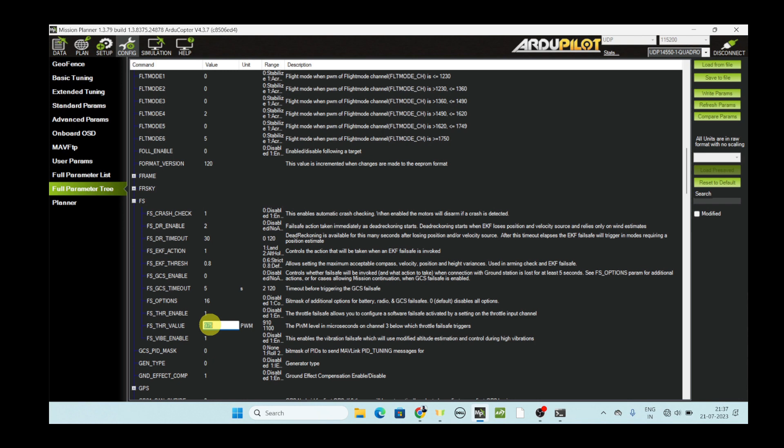First flight settings for an autopilot based drone. To set up your quadrotor for its first flight, follow these general steps. Always keep in mind that the specific details might vary depending on your hardware and software versions. So, always refer to the official autopilot documentation and the manufacturer's instructions for your drone components.

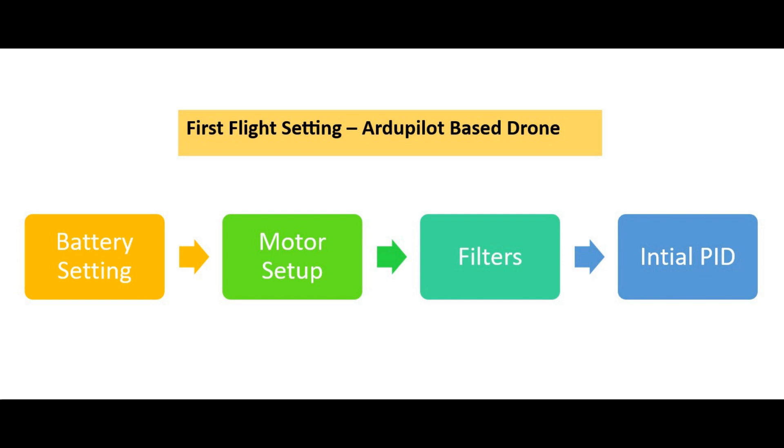Now, I will provide a general outline to get you started. First, battery setting. Second, motor setup. Third, adding filters. And finally, setting up the initial PID. First one is battery setting. Configuring the battery settings for your quadrotor ensures safe and efficient flight operations. The battery setting in a quadcopter primarily involves setting the battery capacity, voltage and current sensor calibration, and low voltage cutoff parameters.

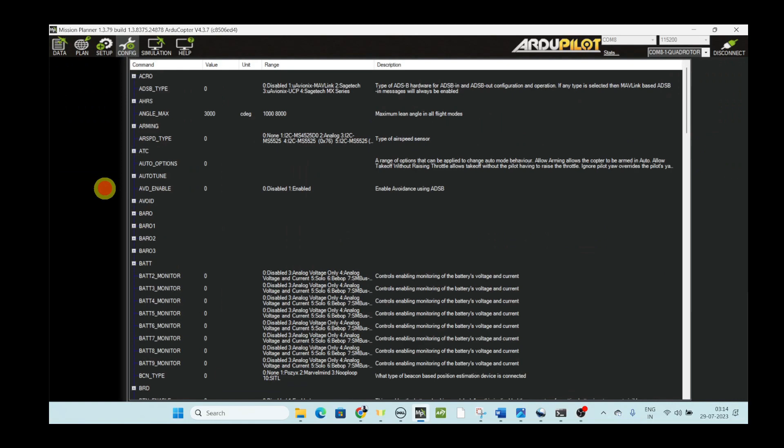Then battery capacity. In Mission Planner, go to the full parameter list or full parameter tree. Look for the parameter named battery capacity. Set this parameter to the total capacity of your drone battery in milliampere hours. For example, if your drone battery capacity is 5000 mAh, you have to set 5000.

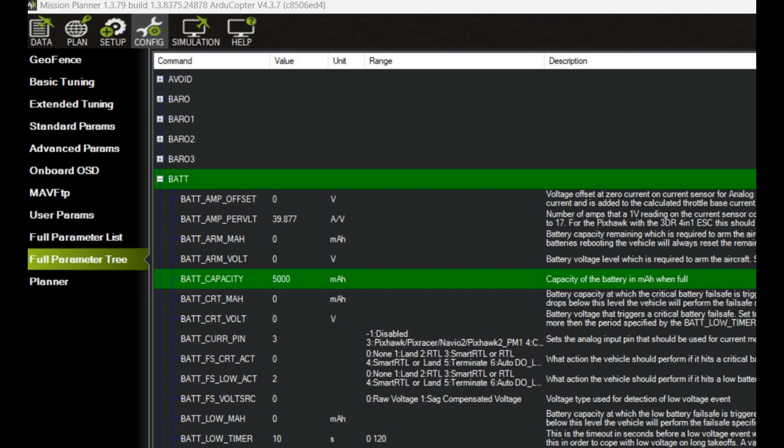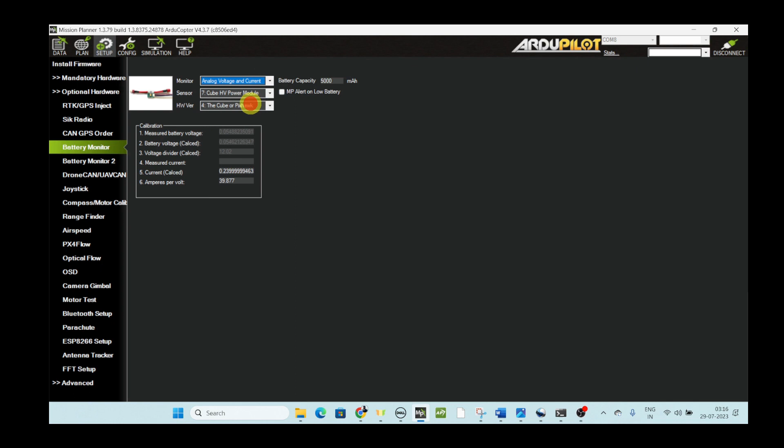Then voltage sensor calibration. Your flight controller may have an onboard voltage sensor connected to it. Calibration ensures accurate reading of the battery voltage. For many modern flight controllers, the voltage sensor calibration is automatic and you don't need to perform it manually. However, it's essential to double check it.

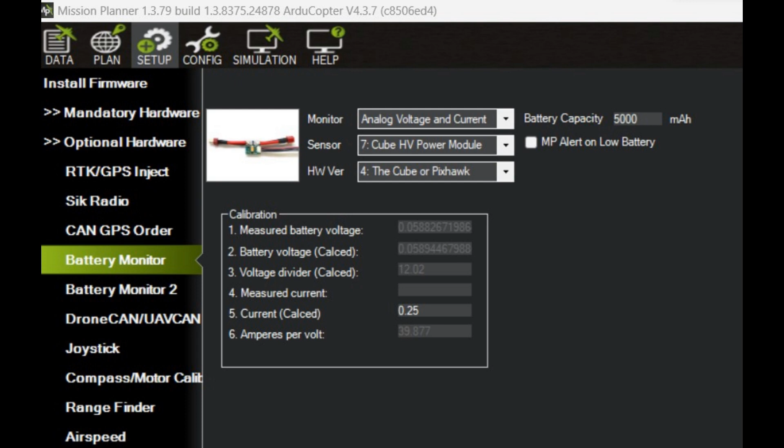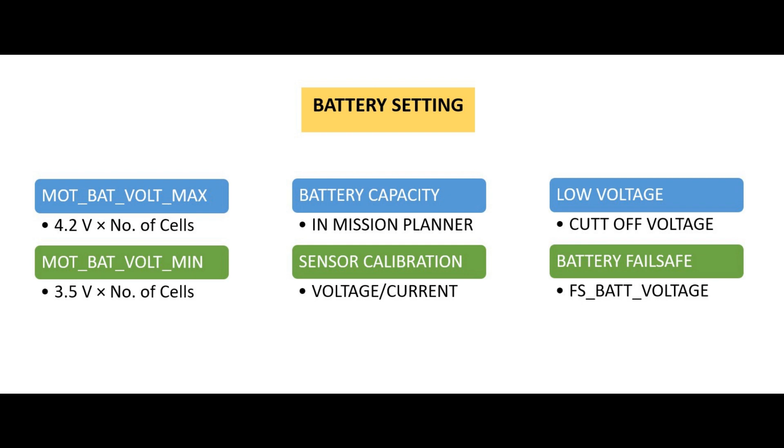Then, current sensor calibration. If your flight controller has an onboard current sensor, or if you have an external current sensor connected, you may need to calibrate it for accurate current readings. Then, low voltage cutoff setting. This low voltage cutoff setting is to prevent over-discharging your battery, which can damage it and reduce its lifespan.

The low voltage cutoff will vary depending on the type of battery you are using, for example, lithium polymer or lithium ion. So always refer to the battery manufacturer's manual for the safe voltage range. Then battery low voltage setting. Set this parameter to the voltage at which you want to trigger a low voltage warning.

Then fail-safe battery voltage. Set this parameter to the voltage at which you want the flight controller to initiate a fail-safe RTL action due to low battery voltage. This value should be lower than the battery low voltage.

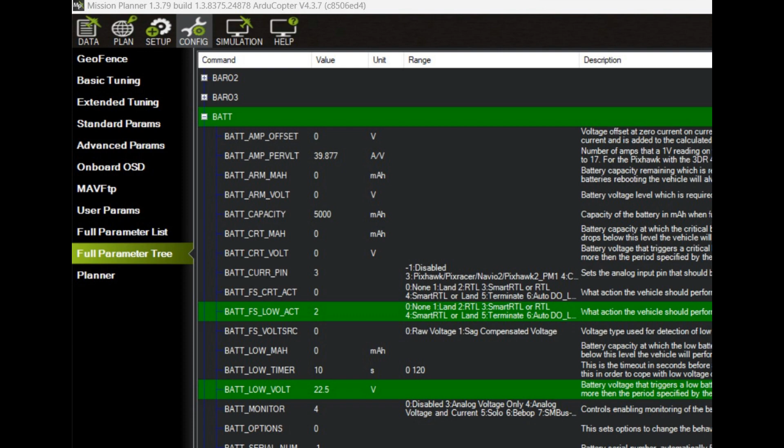Then motor setup. Configuring the motor settings for your quadrotor is to ensure that all the motors spin in the correct direction and at the proper speed.

First one is motor order. First, ensure that the motors are correctly connected to the corresponding motor output on the flight controller. Different frames and different flight controllers may have different motor layouts, so make sure you have the motors connected in the right order.

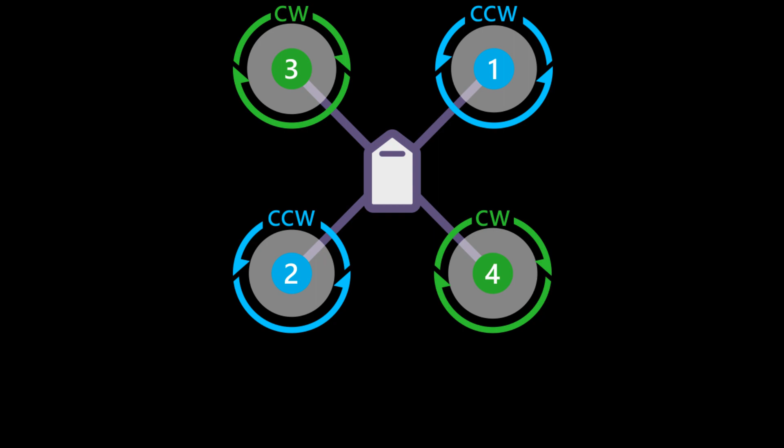Then motor direction. Confirm that each motor is spinning in the correct direction. In the quadrotor, the motors on the front left and rear right side should spin in the clockwise direction, and the motors on the front right and rear left side should spin in the counterclockwise direction. If any motor is spinning in the wrong direction, you can usually reverse the motor direction.

Then propeller installation. Ensure that the propellers are installed correctly on the motors. Each propeller should be securely attached and facing the correct direction. Then motor parameters. ArduCopter allows you to configure specific motor parameters to match your quadrotor's hardware setup. These parameters can be adjusted using Mission Planner.

First one, motor PWM minimum. This parameter sets the minimum PWM value for the motors. The value should be set so that the motors spin at idle so that the quadrotor is stable without lifting off the ground. Then motor PWM maximum. This parameter sets the maximum PWM of the motors. The value should be set so that the motors reach full throttle without overloading them.

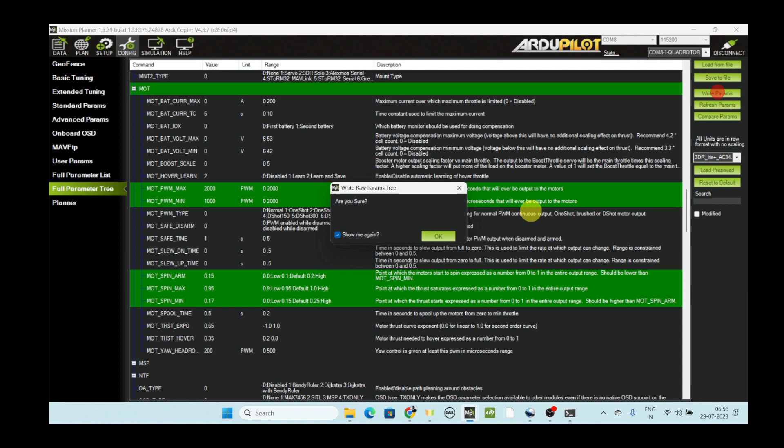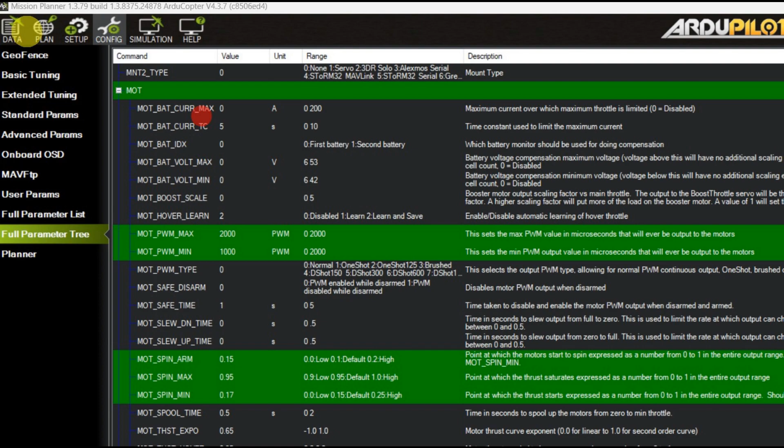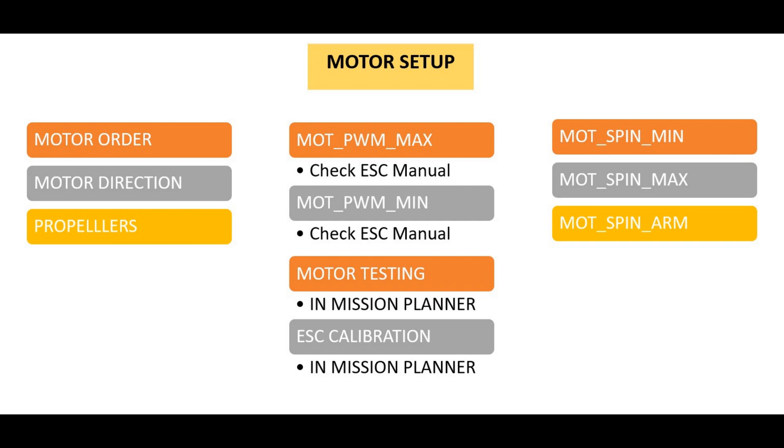Then motor testing. Before your first flight, perform a motor test to ensure all motors are spinning correctly and responding to the throttle inputs from your handheld transmitter. You can do this in the motor testing section in Mission Planner. Then finally, ESC calibration. Some electronic speed controllers may require calibration to ensure that they recognize the minimum and maximum throttle values correctly.

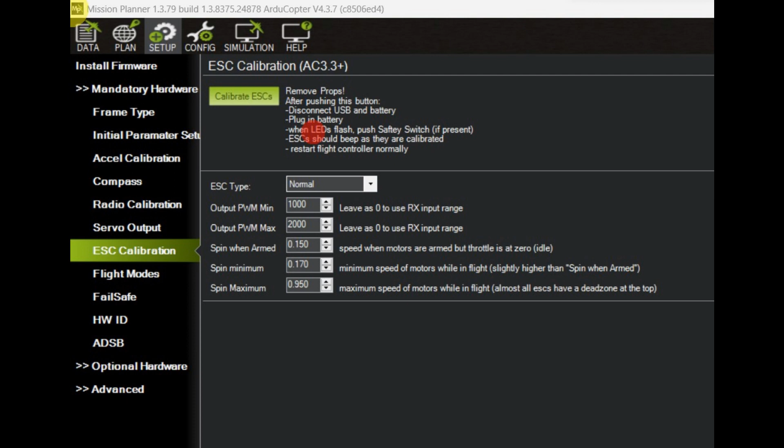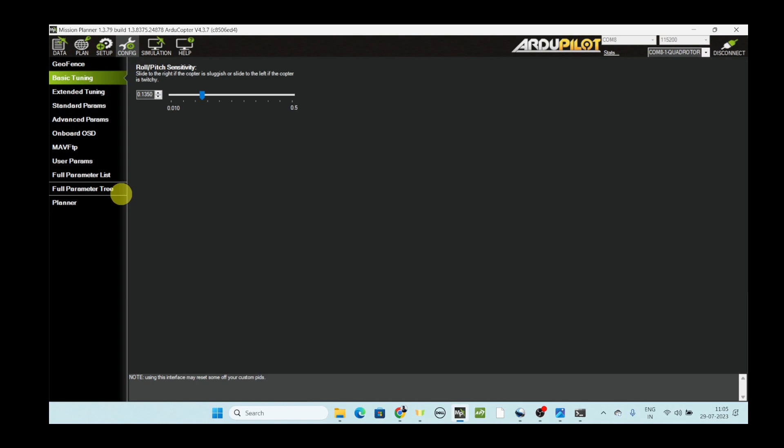Then filters. Filters are used to process sensor data and reduce noise, which ultimately improves the accuracy of your flight controller measurements. Configuring the filter settings for your quadrotor is an important step to ensure stable and smooth flight.

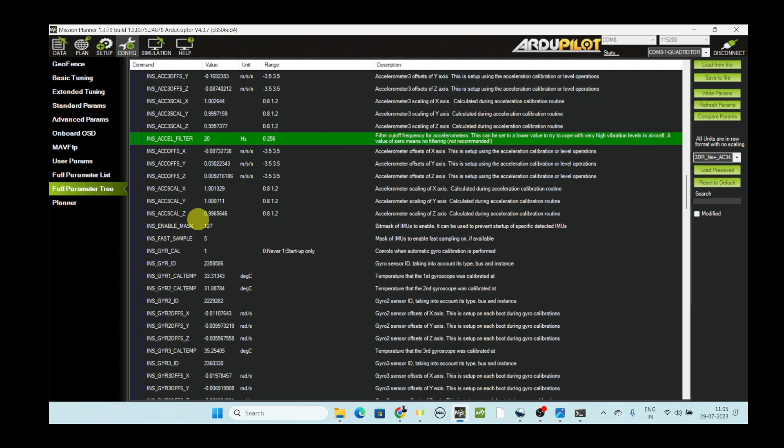First one is INS gyro filter. This parameter controls the gyro filtering in the inertial navigation system. A higher value allows for more noise in the gyro reading but increases the responsiveness. A lower value smooths out the gyro data but may introduce some lag in the quadrotor response. The default value is set to 20, which is a good starting point for most setups.

Then INS accel filter. It is similar to the gyro filter. This parameter controls the accelerometer filtering in the inertial navigation system. The accelerometer filter is responsible for fusing the accelerometer data with the gyro data to estimate the quadrotor's orientation. The default value is typically set to 20, which is suitable for most setups.

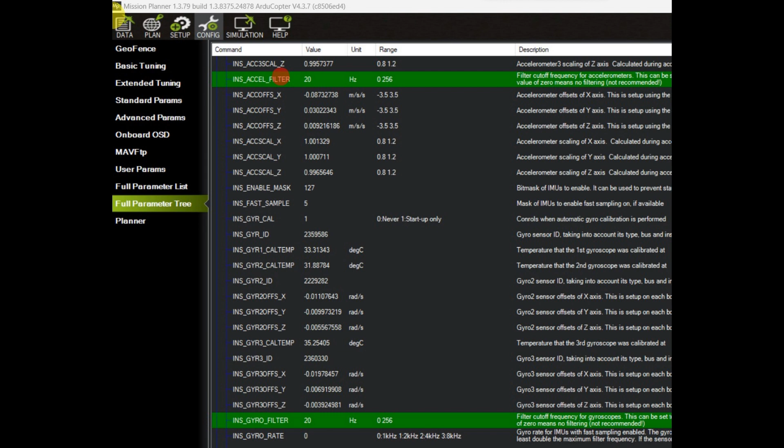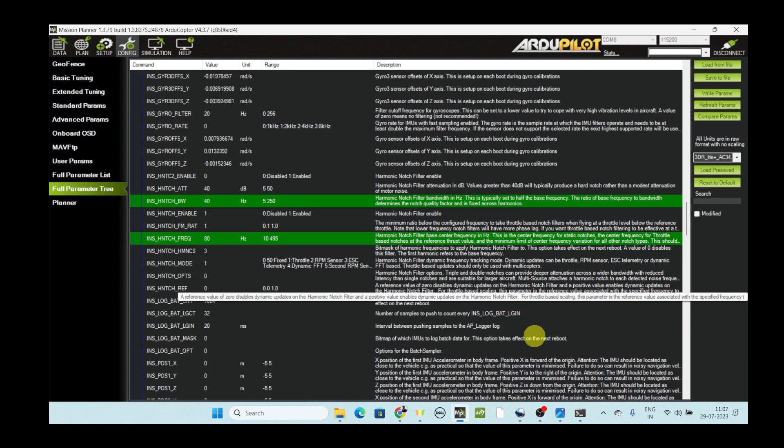Then INS HNTCH enable. This parameter enables or disables the harmonic notch filter. The harmonic notch filter automatically detects and filters out gyro and accelerometer noise at a certain frequency. If the harmonic notch filter does not adequately address vibration or noise issues, you can manually set the notch frequency and notch bandwidth using the parameters INS notch Hz and INS notch bandwidth.

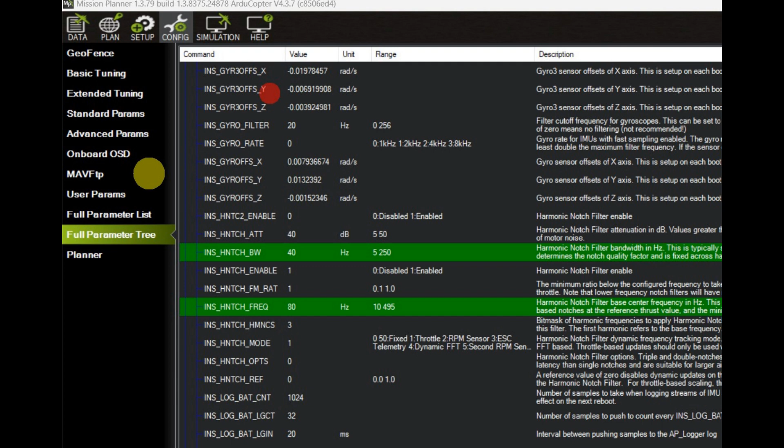Then setting up the PID controller for your quadrotor is essential to achieve stable flight and responsive controls. The PID controllers are responsible for stabilizing the drone and maintaining its desired orientation. First, understand the PID controller. Before you start tuning the PID parameters, it is crucial to understand the purpose of each controller.

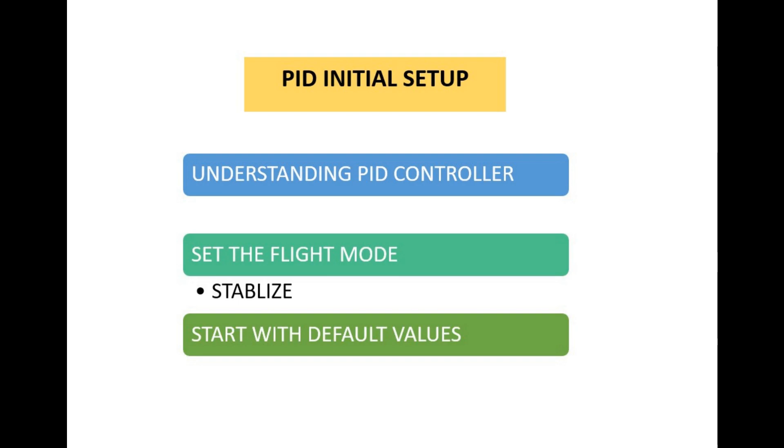First one is proportional. It provides a correction based on the current error. Then integral. It accumulates the past error to eliminate any steady state error, which the proportional controller might not address. Then derivative. It predicts future error by measuring the rate of change of the error, and it helps dampen oscillation and improve responsiveness.

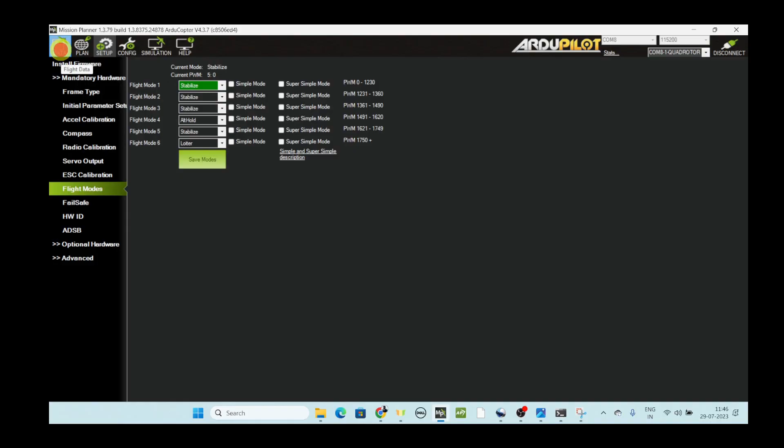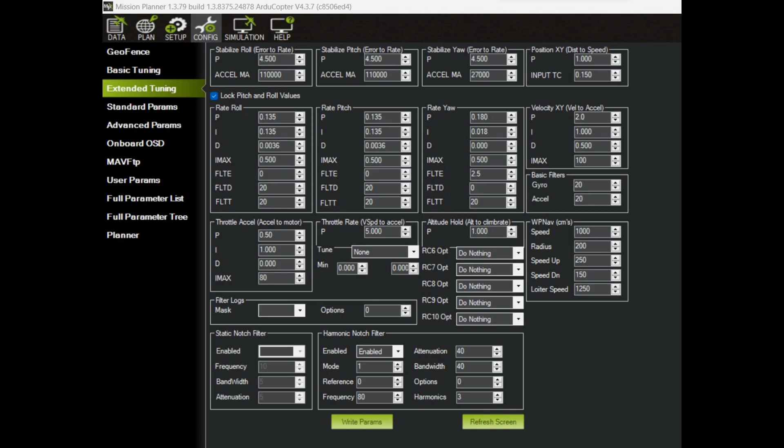Then first set the flight mode. Choose a flight mode to tune the PID values. The most common mode for tuning is stabilize mode. This mode provides basic stabilization and is suitable for initial tuning. Then start with default values. Quadcopter firmware usually comes with stock PID values that work well for most setups. Start with the default values and perform a test flight to observe how your quadrotor responds. If it's relatively stable, you might not need any excessive tuning.

So then perform test flights. Fly your quadrotor in a safe and open area. Observe its behavior during different maneuvers such as hovering, forward flight, and turning. Let's start with the tuning process. If you notice any issues during the test flight, you can start tuning the PID values. Always keep in mind that tuning is an iterative process.

Let's start with proportional tuning. First, increase the P value if the quadrotor feels sluggish or unresponsive. Decrease it if you notice any oscillations or instability. So increase the P value if it feels sluggish or unresponsive. Decrease the P value if you notice any oscillations or instability.